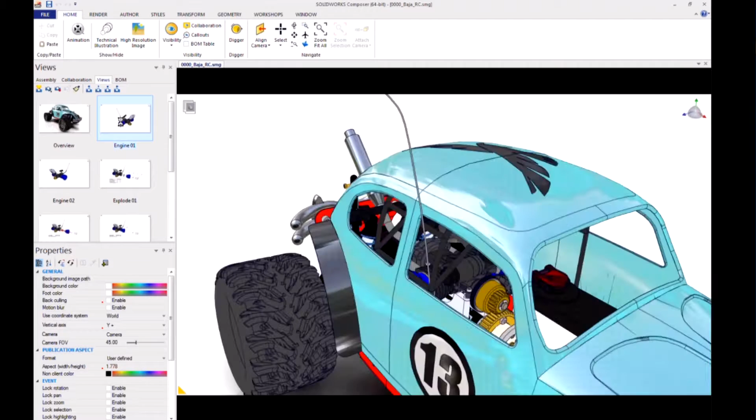So I have some stuff that's been pre-made. But basically we have our RC car, and we have kind of a nice looking marketing image there. And then we go in to create some kind of step-by-step animation. So here we have an isolated engine, maybe change the view. You'll see that all these are views in the view pane here that have been pre-assigned to be assembled.

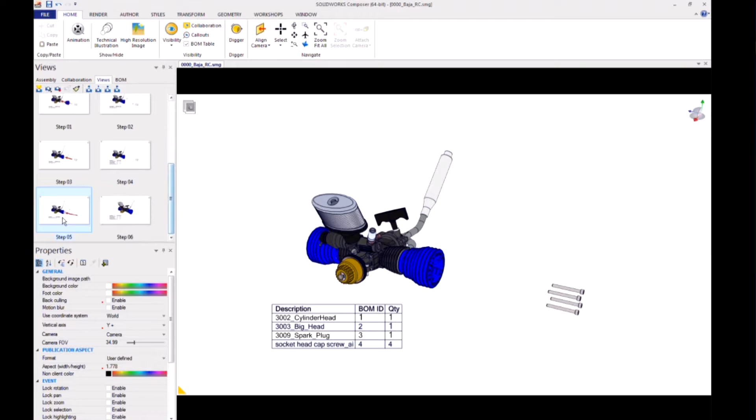And if any of you haven't seen any of our past webinars where we go over how to assemble this, I'm going to touch on that just for a couple minutes, just so everybody is kind of at the same level here. But you can see that just like that, they go together. Now that looks like an animation, right? But I didn't create an animation at all to make this. I just simply exploded the parts out, told them to go back home. Composer did the rest and did all the in-between movements.

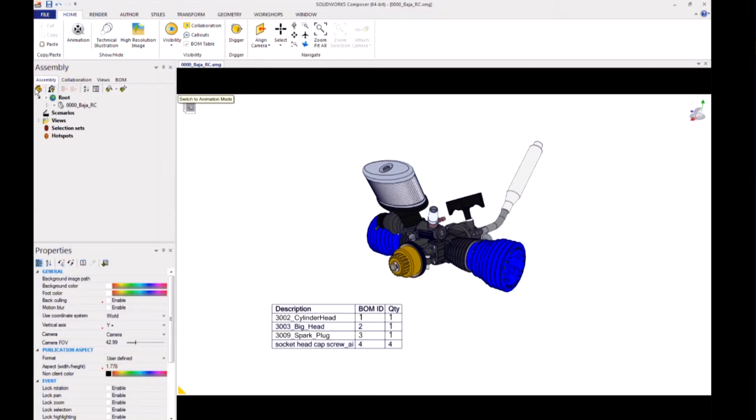So let's say that we want to make an exploded view of this guy here. So what we would do, let's go to the Assembly tab, go ahead and do an assembly select on that component. We can either isolate it. I was going to isolate it, but instead I think I will just pull it out from the model here like this. So we take it, and we'll kind of move it out. It's going to hide the bill of materials.

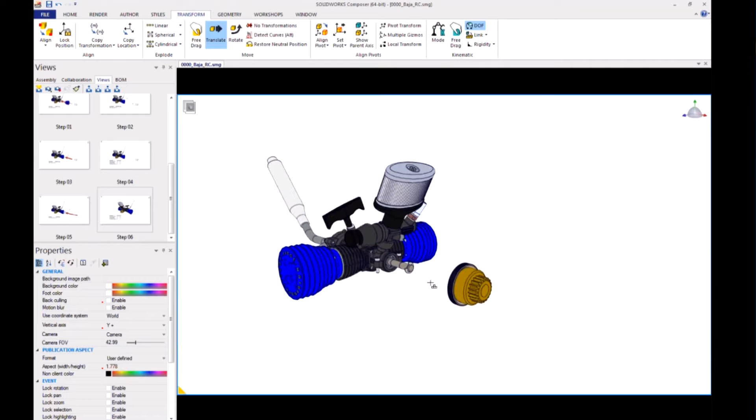And then I want to do a quick explode view on this guy. So this linear translate, explode, and we simply grab that, drag it out. And what I like about this tool is it always leaves one part kind of stationary where it's supposed to be. And that's really nice because when we go to actually develop that animation, we simply click on the parts we want to go back home, go to restore neutral position, and they go into location, and then you simply go over here and you create a snapshot.

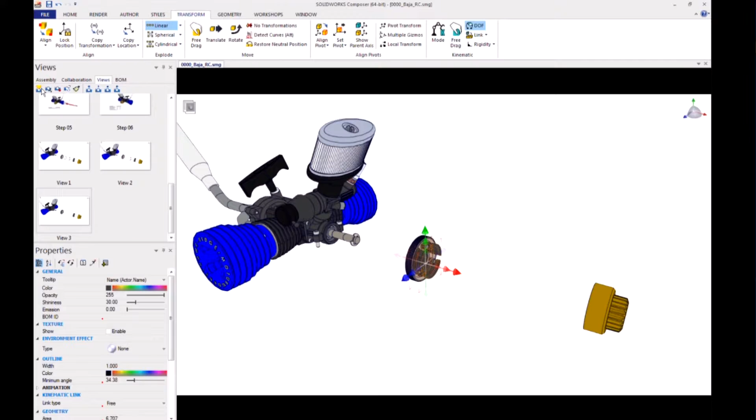So this is how animation is developed. It's identical to developing any other kind of procedural step-by-step content out of Composer. Create an exploded view, select your components, tell them to go home. Select some more components. Actually, this one probably is installed first, but we'll go ahead and stick these guys on. We're going to restore those. They go into location, create a step. Select those guys, location, step. Last one, location, create a step.

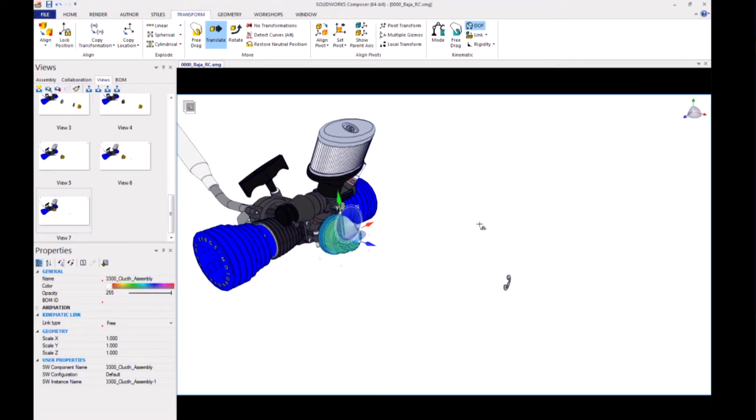And then once our assembly has been assembled, we'd probably want to take this guy just to be a little bit more accurate here, pull it out, and go to assembly, assembly select mode, click that guy, tell it to go home as well. It goes into place, create a step, take this guy here, and do the same thing, and something like that.

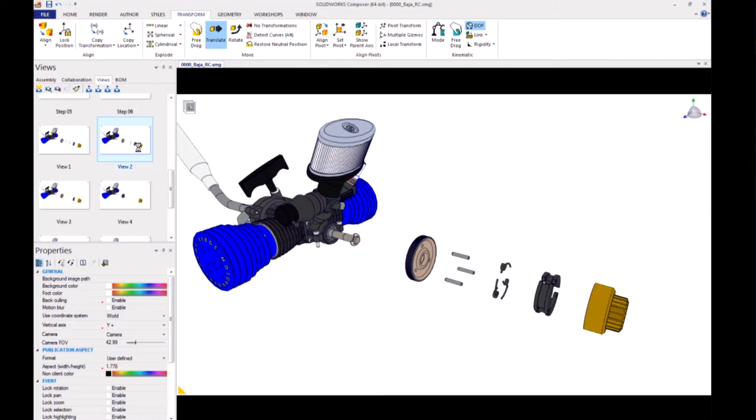So I mean, it really is that easy. Basically, I just blew it apart, put the things back together, and that's it. But take a step back and look at what I just did, and Composer is going to animate every step of that process. So it goes together, together, together, so forth and so on until the whole thing is assembled. Now I have all of these steps here. I'm going to go ahead and save this to my desktop just in case we need it. There we go. Okay, so I've just created an animation.

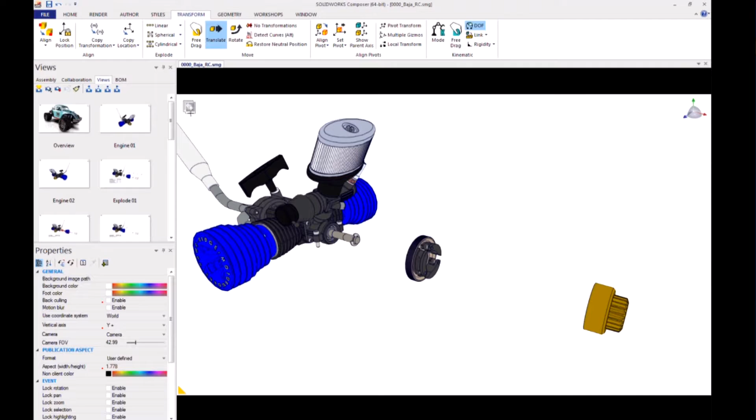Now I just need to put it in the timeline so I can either output a video or a series of images or my interactive content. So if I go to this little button right here, right now it's on the Polaroid Pictures. If I click on it, I go to Film Strip. That puts me in animation mode. You'll see that the timeline by default isn't shown. You just go up here, you right-click, timeline, and you got it right there. So now I can go ahead and I can start dragging my steps

into the timeline here. And what I typically do, if I was doing this for a job, I would take my step, I would drag it in, and I would drag it in twice, about a second apart from each other. Because you'll see when you show the animation, they have these nice little pauses where they pause before they move again. And so each one of these I'll bring in twice, about a second apart. And it's not necessary, I just think it looks a lot nicer. And when you play with this, I think you'll understand what I mean by that.

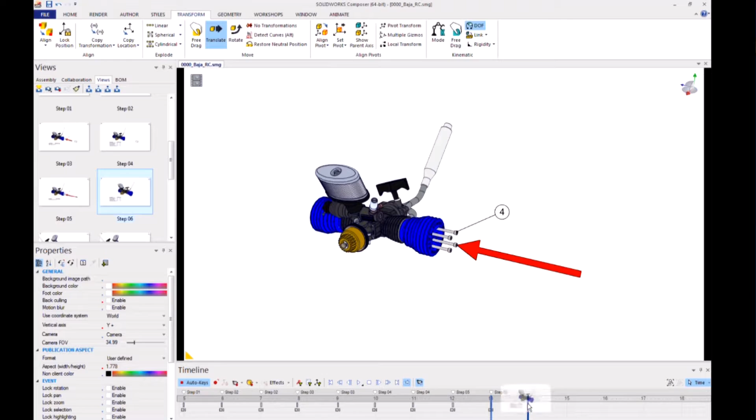Because if you start dragging these views in without doubling them up, then everything starts moving around and it gets a little confusing. And this way, you got these nice pauses that really help define what's going on. Okay, so

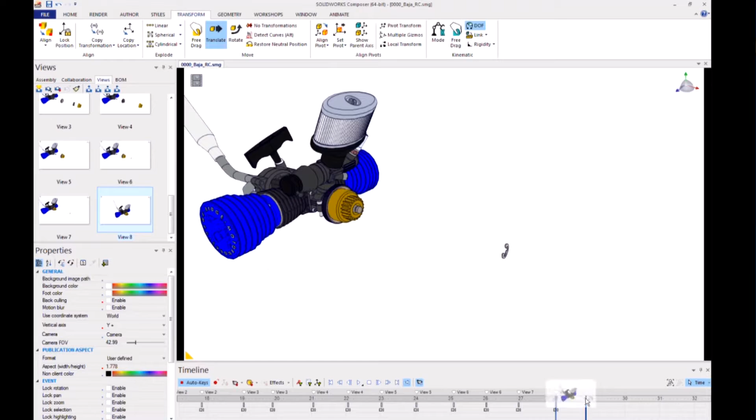I'm almost done here. You'll see this is just a step that I'm taking. This is simulating an old document. So just say I had this old assembly instruction that I saved as a PDF or something like that, and I've had it sitting on the network for 2 years. Now I can go and take it. I can grab the views that I made back when, drag them into the timeline, just like this, and I'm done. Now if I rewind it and I play it, we can go ahead and see this animation play out.

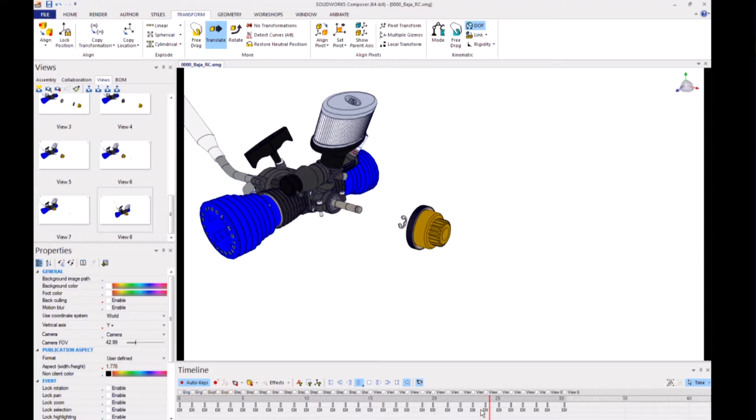If it's moving too fast or too slow, we can simply go down here on the timeline. We can make a selection. Oops, I didn't mean to grab that. Let me go ahead and fast forward it here. You can make a selection, and then there'll be a little toggle where you can then shrink or expand this timeline to either speed everything up or slow it down. There we go, last piece went on.

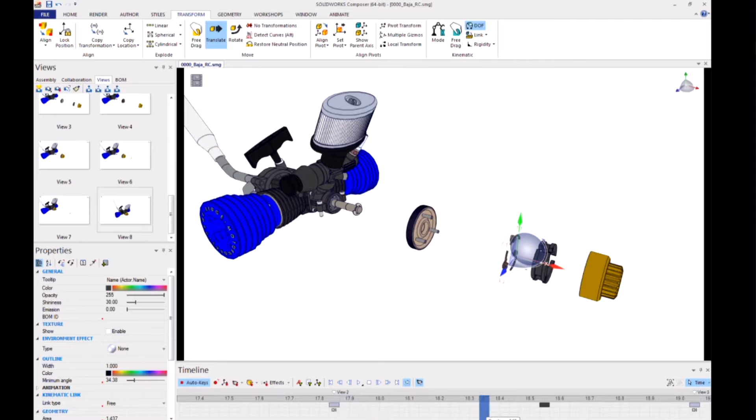We have full keyframe control, so if you zoom in, you can see that each one of these are broken down into individual frames. And if I wanted, at this stage here, for whatever reason, I wanted these guys to go in the other direction before being assembled. I don't know why you'd want to do that, but you'll see that since I did that, they go to that point, and then they reverse direction and go to where they go.

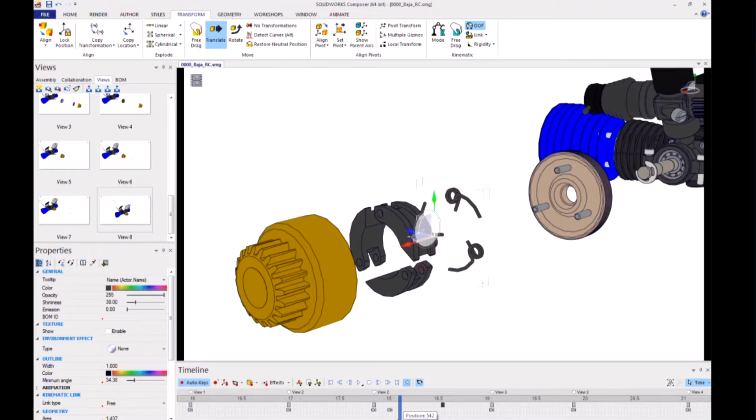I can also change the camera angle. So let's say at this point in time, I wanted to look at this from a different perspective, something like that. Create the little camera key there, and just like that, the camera will spin around. I want to double the camera up twice as well, so the camera stays in the location, and then swings back to where it's supposed to be, and then does its thing. And just like that, this is ready for publication.

So what I would do at this point is choose how I want to save this as a video. The easiest way to do it is to go to Workshops, Video, and then do a Save Video As. And what it's going to do is take the entire timeline and save that out as a video. Let's see how long we have, about 30 seconds. So if I put this on my desktop as an AVI, this is going to pop up.

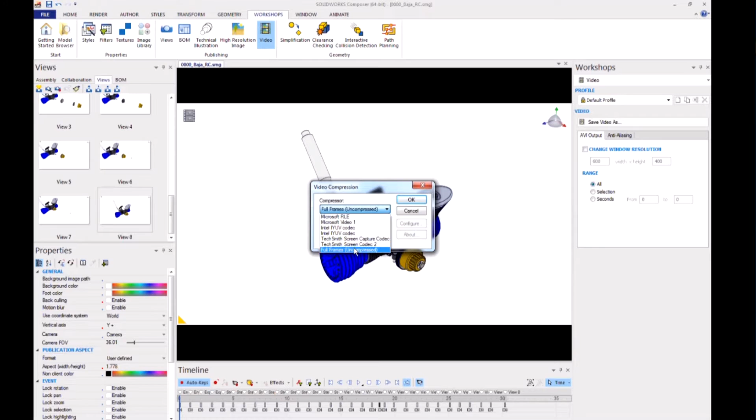And this is typically where people get confused and they say, okay, what codec do I use? I really don't use a codec at all. There's a lot of options here that come pre-canned with the software. Every codec, in my opinion, kind of has its own set of complications and flickering and stuff like that. If you do the full frames uncompressed and just save that out as a video, AVI, this will take roughly 45 seconds or so.

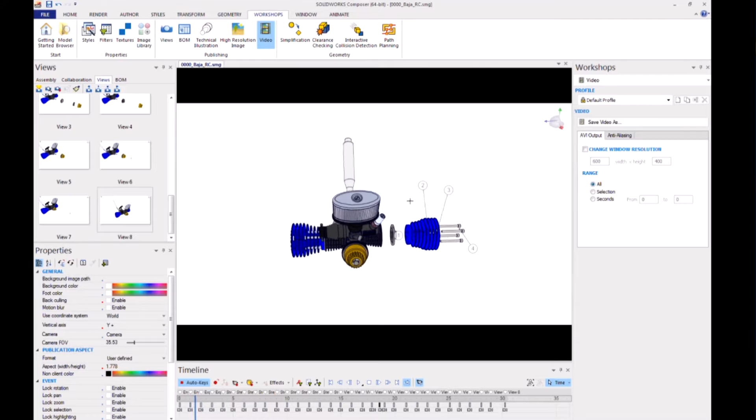And while that's doing, I'm going to switch back to the PowerPoint and talk about where we're at. So we're going to let this render out, but the key is to do it uncompressed. You're going to have a huge video file, one that you can't really do anything with, but then we're going to compress that down to a manageable size, and we're not going to lose any quality that way. So jumping back to the PowerPoint, let's see where we're at.

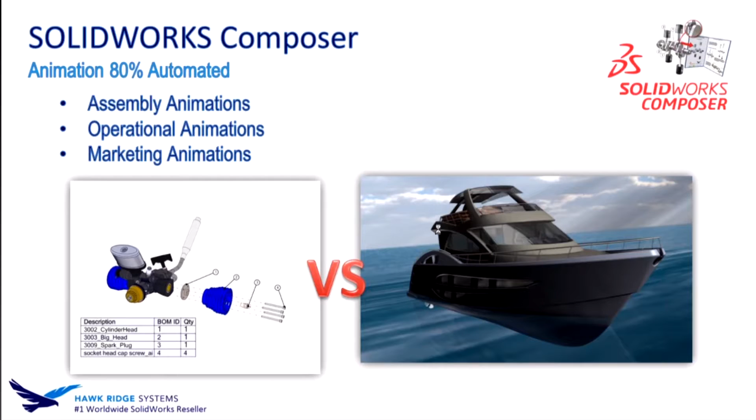So just as a recap here, we did step-by-step assembly views. That's just taking sub-assemblies, pulling them apart from the model, making a basic exploded view, and then telling those items to go back home. That's as simple as selecting it, saying restore neutral position, it knows where it belongs, it goes there, and you create a new step of the procedure. Once you're happy with all those, you drag those into the timeline. You can position them at any point in time that you like to speed up or slow down the animation.

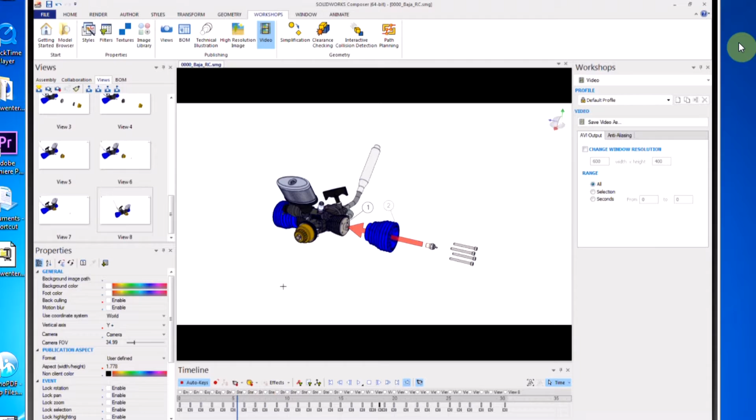And then, once we're done with that, we save out as a video or image sequence. I haven't gone over the image sequence yet. That's my next step. Right now I'm saving out that video. So let's turn it back to Composer and see where we are at. All right, so this is going to take a few minutes, but I should be able to stop it, and it will still save out what I already did, which is nice.

So going into my desktop, you'll see that I have this file. And I stopped it prematurely because I just didn't want to wait for it to finish with this webinar because we have limited time. And we'll see that this file is rather large. It's 304 megabytes.

And that is bigger than I would like for a video of this size especially. So my trick is to use this program called Handbrake. And Handbrake is absolutely free. You can get it off like download.com. It's an open source program. It's safe to use, and it's simple, and it's just a great program.

So if you go source, video file, and I grab the one that I just made, and I just want to go ahead and specify where I want the new one to be saved. We'll call this video animation, something like that. I typically use the default settings.

MP4, it saves as an H.264, which is a video file that is compatible with nearly every device out there, you know, iPhones, PCs, you name it, iPads, and different Android devices and stuff. So website content, it's just a way to produce a video in the most user-friendly fashion possible, and it'll take huge multiple gigabyte videos and compress them into just very manageable size.

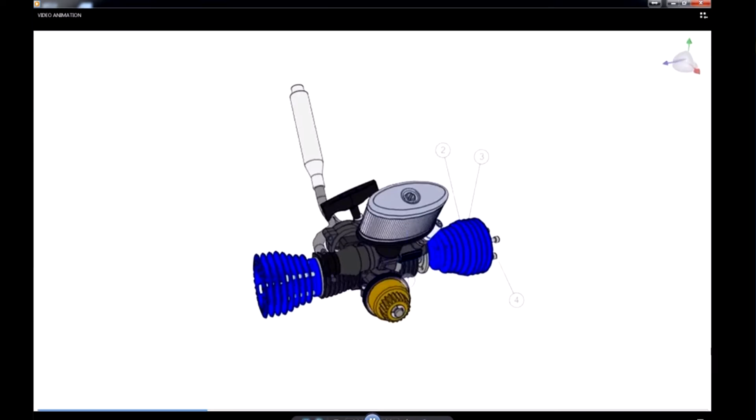Like this one here, it went from 300 and something megs to 210 kilobytes, and I still have really good video quality. And there we go. So there's the video that I saved out, and that's called Handbrake. It's an excellent program. I recommend it to all my customers. And now we're going to go back to Composer and publish this out as a series of images.

So now that we have this animation developed, we can save it as a video. My preferred method is actually to go to the high resolution image output. Here we can specify exactly our frame size. So 1280 by 720 in this case, it's 16:9 aspect ratio. With the DPI of 300, I'd probably make that about 600, just to get a little bit better quality. You go to multiple, animation, images per second.

I changed that to 25 or 30. 25 is about standard. And we just say, hey, we want to do all of it, or a selection, or maybe let's go from like 1 second to 3 seconds or something like that. Save as. We'll say create a new folder, save that, and it's going to go through and it's going to render these images. And while it's rendering, I'm going to go ahead and show them.

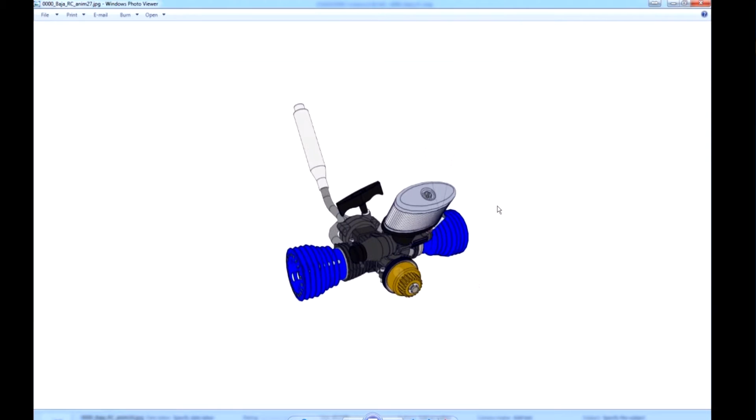So here's the images that are being rendered out right now. And they're very high quality, and you get just a series of all these images. So if you really want to make the best animation possible, this is what I would recommend. Going to the image output, outputting a series of images for all of your frames, and then bringing these into a program like Windows Movie Maker. I know there's one for Mac as well that's free. There's Adobe Premiere that works pretty good. You just dump all the images in there, save it as a video, and you can get that ultra high definition output if you want to do that.

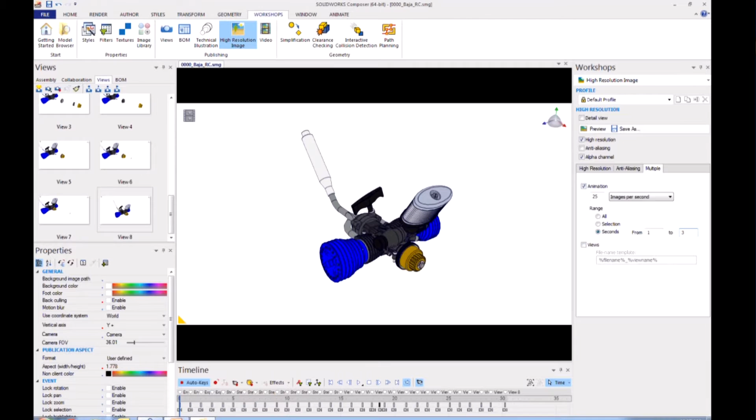If you're just making website videos and stuff like that, just output as an uncompressed, use Handbrake to convert it, and you'll be good to go. So it's kind of two different reasons why you would do this. Okay, so let's peek back into the slide here. And where are we at? So output is video or image sequence, so that's kind of our final, right? We're done with the animation.

However, if we want to do interactive animation and we want to send this to the shop floor, send it to our customers, and they want to be able to rotate it and click around and really interact with the document, we can do that in just a few easy steps here. So what we're going to do is we're going to add what's called event linking. And event linking can be anything. I can set this up so I click on a tire and it opens up a website, opens up a drawing of that tire, you name it. There's really no limitations to that, and I'll go ahead and show that to better explain.

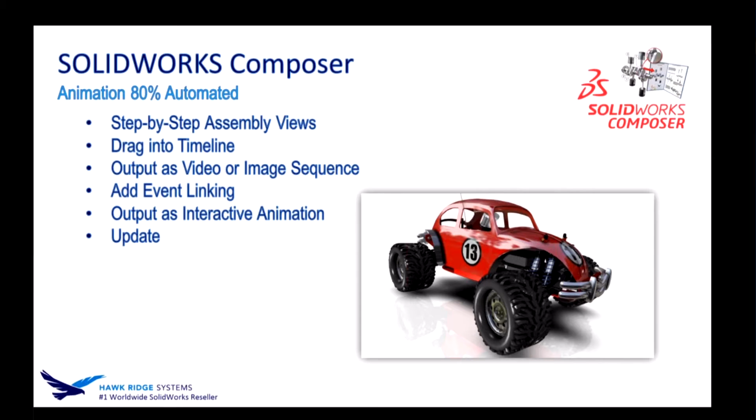And we're going to go ahead and output it as an interactive animation. At the end, we're just going to go ahead and update everything and show how everything that we make in this presentation is still associative back to the SOLIDWORKS assembly. So let's go ahead and jump into here. And let's set this up now for interactive output.

And really right now, I could just say File, Save As, Package, and I could save this as a self-executable exe, and whoever opens that will see everything that I made here. They'll get all of the toolbars on the left here and the timeline controls, and basically have kind of a version of Composer, but it's just view only, where they can play the animations and see what's going on.

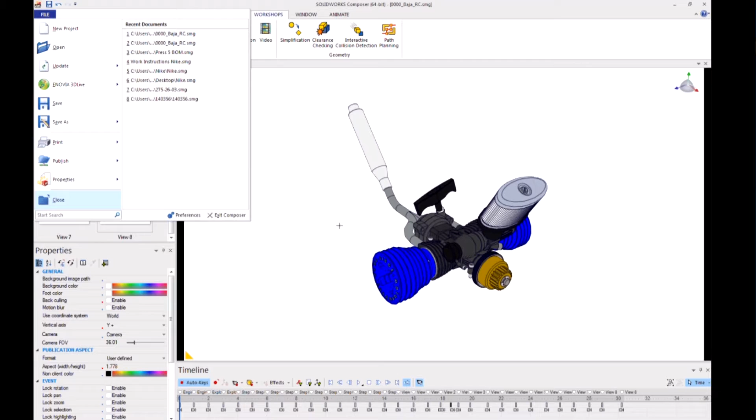But we can control this a little bit nicer just to get better experience out of it. So to do that, for the event linking, let's see, I go here. Our easiest tools for event linking are the automated ones, and I'll show the automated and the manual. So here's Author 2D. If I go to All Buttons, and I just stick these somewhere down at the bottom there. And by default, they come in a little small. I'll go ahead and turn off the timeline just so we have a little more real estate.

And what you want to do is set them, go over to width in the properties, and I typically make these like 25 or something, just to make them a little bit bigger. They will merge, like cross over each other. But if you take a magnetic line, we can snap to them, and then space them however we want, something like that. Okay, so by default, these buttons are a way to go to the next page. So I can click on that, they go to the next page of this interactive animation.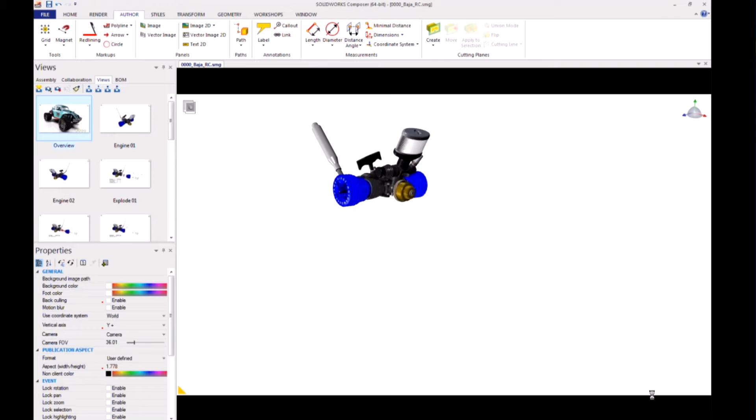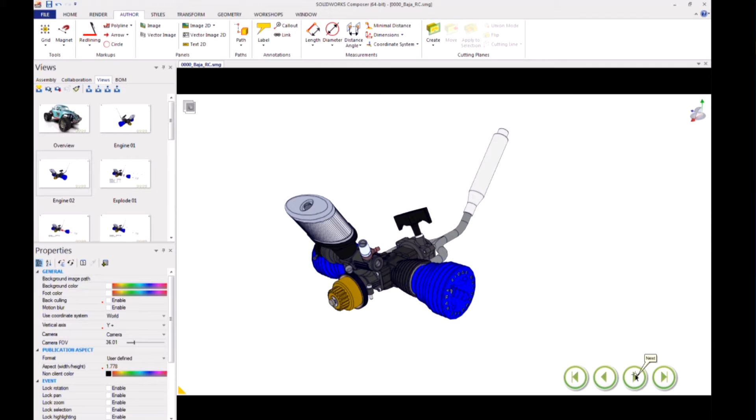So I want to take these buttons and push them to all the pages. So I grab them, scroll down, select everything. This little button there just pushes that data to all of my views or all my pages. And now I've created an interactive experience that anybody who views this document will be able to click on these buttons and go through the entire process. You can also control, kind of like a table of contents, what people can do and if they can skip steps or not.

And to do that, you just go to a view that you want to use as a table of contents and select views that you find important. I'm just going to select a few at random here just to get the point across. These guys. Hold down Control, drag them into the view. That places those thumbnails. I'm going to go ahead and update this guy, and then our magnetic line, which is always our lifesaver here, we snap it in, position them something like that, just to stagger them out, magnetic line, and snap to them. Just like that. Okay. So now I have a full interactive experience, and this was the automated version.

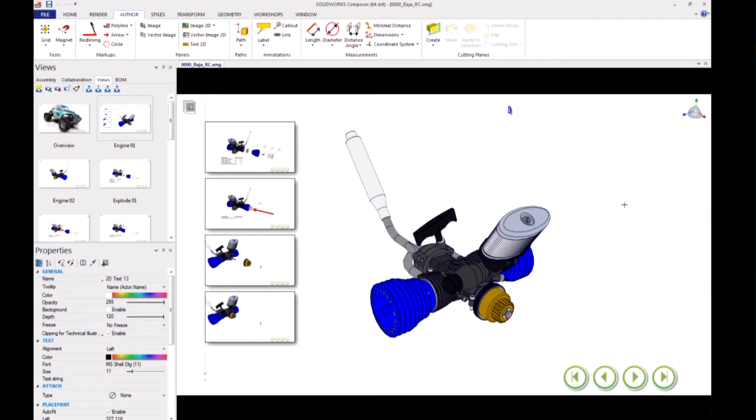If you want a manual version, what you do in that case is you would select a text or a part. In this part, I actually want to have a little text block that somebody clicks on, and it's going to play a section of the timeline. So I'm going to say play animation. And again, this is all optional, but just nice little tools that you can use to really spice up this interactive experience. So what this is going to do is jump into the timeline and play a section of the timeline for animation. So now I just need to specify that.

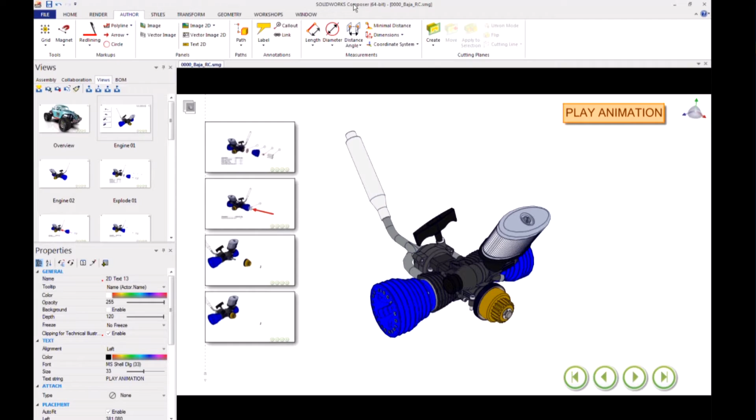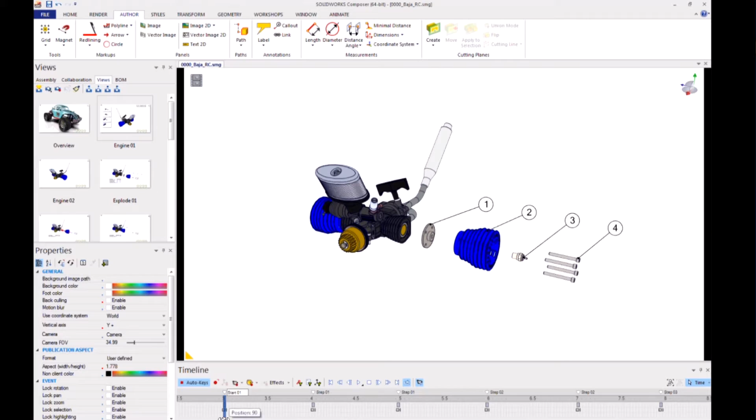So if I go back to the timeline, let's just scroll this and find a spot that we like. So let's say we want to play from this point here, we'll call this start 01, and we want to play it all the way to here. We'll call this end 01. And the important part is just to remove the markers that are in between these two markers, because we don't want them interfering with our animation.

So we have a start position and end position, and now I want to specify that when this button is clicked in the view, it's going to play this section of time, but I also want to get back to the view, so I'm just going to select this view, drag it into the timeline, so we have this nice little image here that will bring us back to our views.

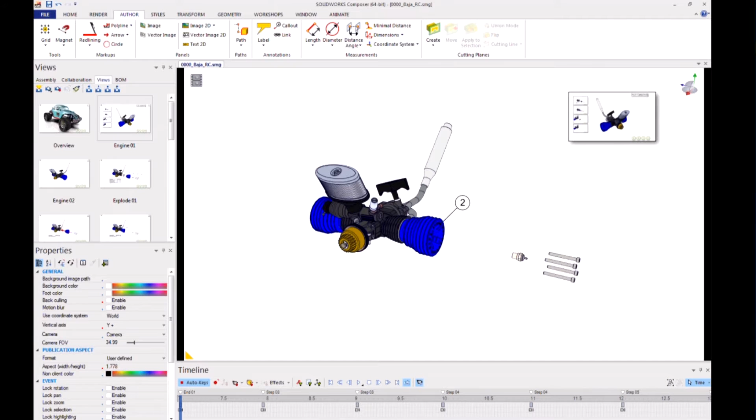Okay, now I go to my view, I say play animation, and let's go ahead and link this to that guy. So to do that, there's our event links. This is how we do it manually.

Now keep in mind, I can say that I want to open up a file and have it open up an image or a drawing or a PDF or anything like that. I can have it go to a website. If I had something online and I wanted to point people to, you click on that, it opens up the browser, navigates to the website that you want them to. You can jump to different views of this document. There's a lot going on here.

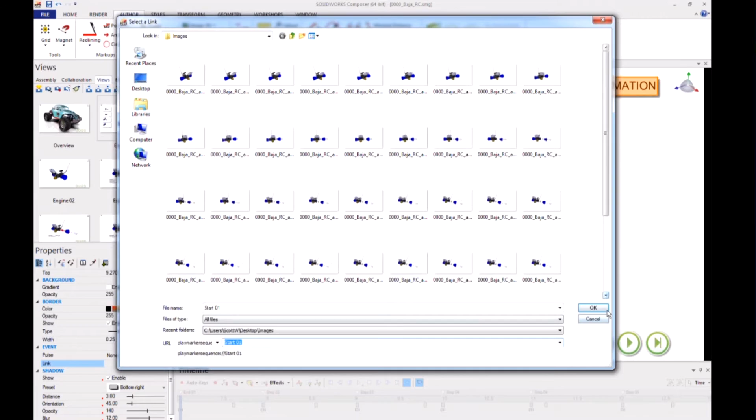This is what we go to for that marker sequence that we made, which is the Start 01 to End 01. There we go. So now I'm ready to save this as an interactive file and test it out. So just file, save as, package, and it is as easy as that to save out an interactive document.

So what it's doing is it's taking this entire Composer document, it's compressing it into a file that has the player built right in. So with this interactive document, there's no need to have anything installed. So I have this self-executable file. You go and open it up, and you can send this to anybody. They don't have to install anything special on the machines.

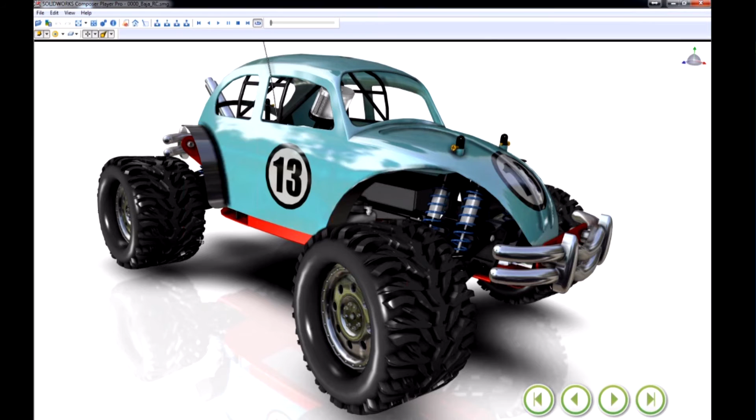It opens up all the content that you made, and you'll see the experience that I added in here. You can specify to have these off as well, so you don't have control there. But there's my marketing image. I go to my next button. I'm just going to jump into this view. I can jump to different areas of the assembly instructions. I can play the animation that goes through.

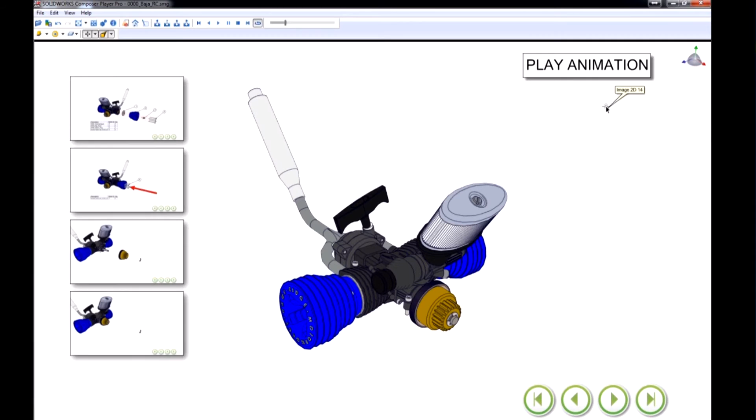I get a view here that takes me back to that step, and then I can go ahead and click on these guys and jump to any position that I want. Keep in mind this is all 3D, right? So somebody could come in, they could take a look, and they could really check this out.

We can also control this. We can say you can't rotate, you can't pan, you can't zoom in, you can't make selections, you can't hide things, or you can allow all that. Same with measurement. You can allow or disallow measurement. So there's a lot that we can control with this interactive animation.

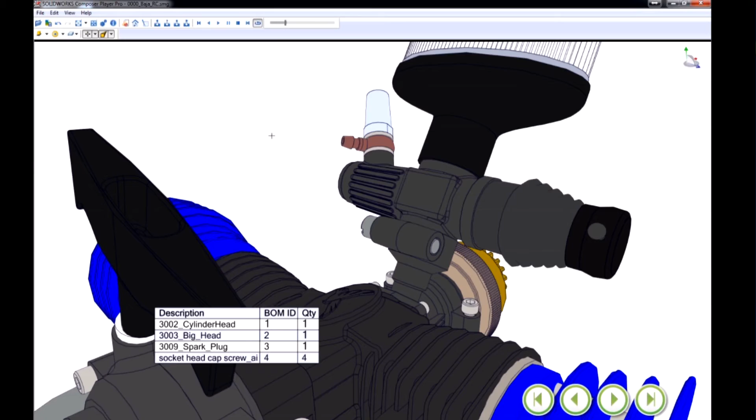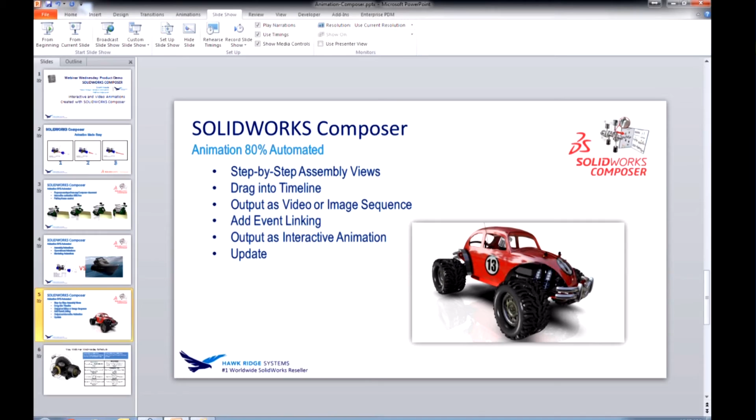Okay, so last thing on the list here is just to update. So this is going to take about a minute. Looks like we've got about 5 minutes remaining here, so we have enough time to do this last little part. So what I want to show is how, and I'm just going to do a quick update, so this will update while I'm speaking here. Basically, I'm taking an updated version of this entire assembly.

This version has quite a few changes. The cover is red. The tailpipe is a little bit bigger. The air filter is a little bit bigger, and I think there's a few other changes too. There's like a pulley in here I should have pointed out. Oh, you can see it here in the little previews. It's black. I think the new one's like red or blue, and it's slightly larger. And so we've done a few changes. I think we've got rid of the roll cage too.

And what I wanted to show is that when you develop anything in Composer, and we have our steps that we put together, animation we put together, anything you do in the document is still associated back to SOLIDWORKS or whatever CAD file you used. SOLIDWORKS, of course, works perfectly with Composer, but you don't have to use SOLIDWORKS files. You can use Rhino files or STEP files or ProE files or OBJ files.

Anything you find on the internet, especially on like GrabCAD and stuff, 99% of the time you can bring those directly into Composer, and you can use them in conjunction with your SOLIDWORKS assembly. So I could bring like trees and background environments and stuff like that right in here as well. When you go to update, it points back to the original CAD files and updates everything you did in Composer.

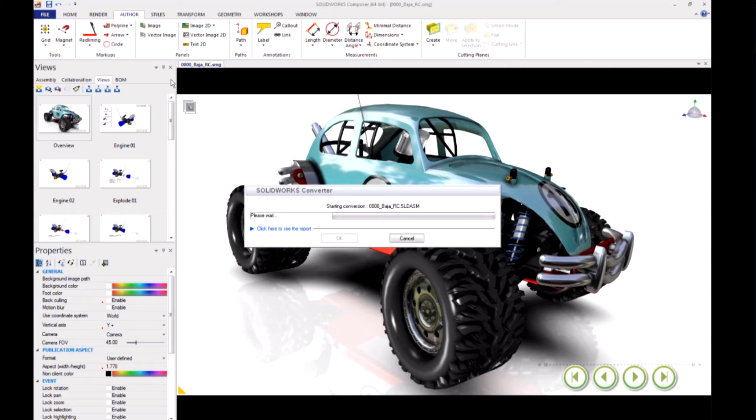All the steps that we did, even the ones I added myself today, are going to be updated with these changes taking place in SOLIDWORKS, and it should be done in just a couple seconds. Keep in mind, this also updates all of our publications, because like the exe I saved out, I just go and save out another exe, overwrite that one. If I wanted to save this as a PDF document, I would simply save it as a PDF, probably rev it or replace the old one.

All the images will be updated as well. You just output all the images, and all those images in my folder will be updated. Anything linking to those will also be updated. So you create this really associative environment workflow that just works from CAD all the way to your end deliverable, which is your publication. Let's go ahead and thumb through these to show there's no smoke and mirrors here.

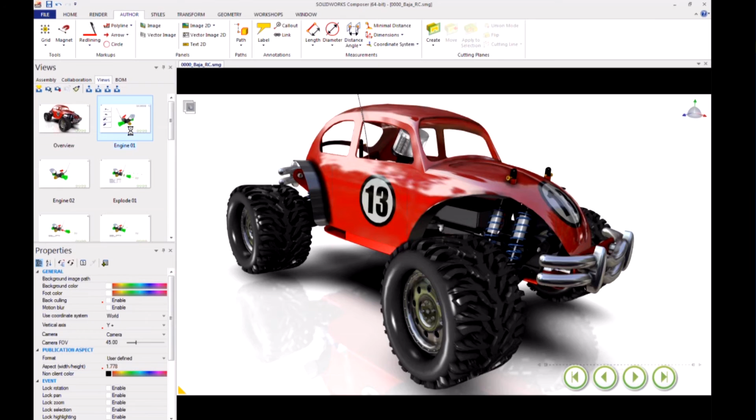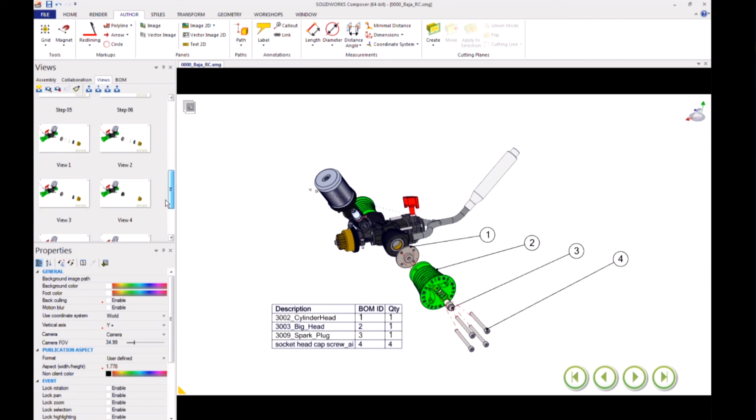Basically, it went through and updated the geometry - there's the handle, a larger air filter, a little bit larger pipe there. I think maybe that pipe didn't adjust, I could be wrong. These heat sinks are now green and they're slightly larger. Going down to the ones that I created, you'll see all of these have been updated as well.

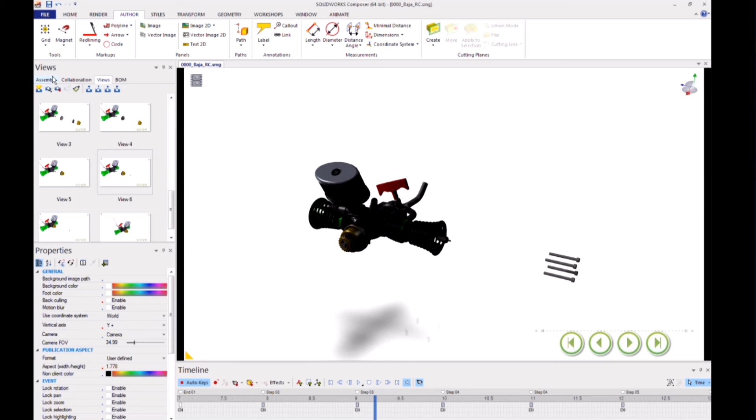If we go to the animation and play it, let's turn that timeline on. Go ahead and play the animation. I'm going to turn off this guy here, and turn off these other guys. Sometimes this happens - Composer doesn't really know which part you want on or off in the animation, so it'll kind of turn everything on.

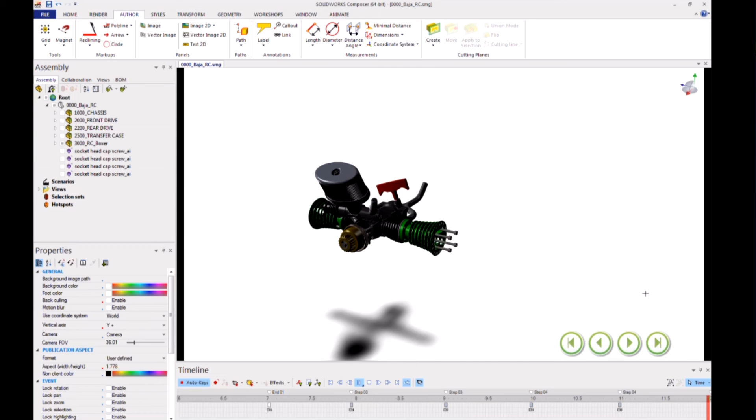It's super easy though, just to go there and turn things off. Like these buttons, we probably don't want them in here - jump into the collaboration panel and turn those off. But you'll see that the animation I did has remained, and all the steps I did are still here. Let's go ahead and change this guy like that, and there we go.

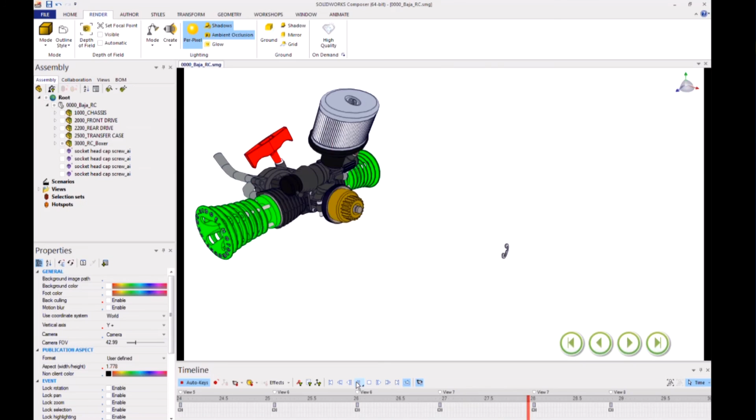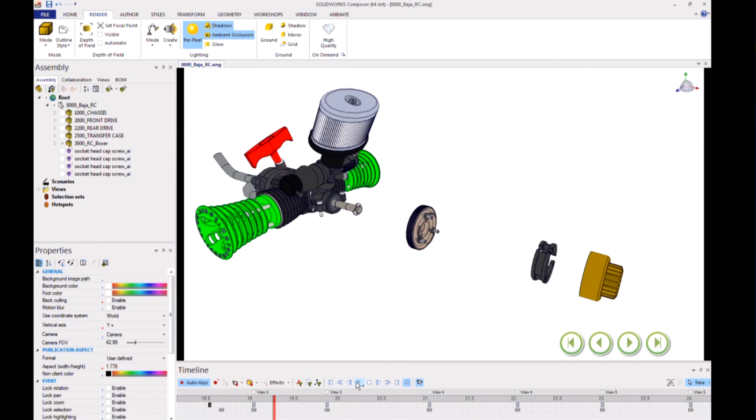Within just a couple minutes, I was able to update this animation, which is unheard of in the animation world. Typically, you make an animation and you're stuck with it. If you want to update it, you have to go through every frame, make all these little tweaks, try to change things so it doesn't explode on you, and it becomes a nightmare, especially if you've made relations and then updated the geometry with animation based off that. It just becomes a nightmare. In Composer, it doesn't care about any of that, it just works - very visual communication and able to get the point across.

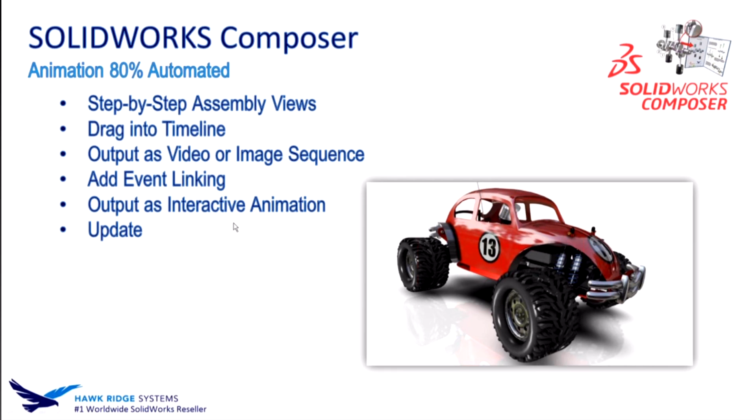Let's go ahead and wrap this up. So basically we went through this whole list, did the step-by-step views, jumped to the timeline, output our image sequence, added event linking, and then output our interactive exe document. Then we went through and updated, and everything in Composer updated. If I wanted to update these deliverables, I would just go back through, output those images, and then re-output that exe, and you're done.